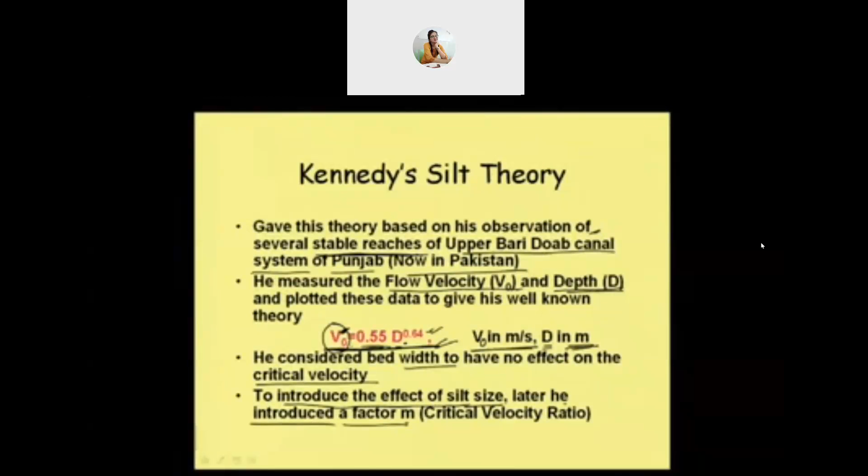So to introduce the effect of silt size, he later introduced a factor m, which he named the critical velocity ratio. So m is V by V0.

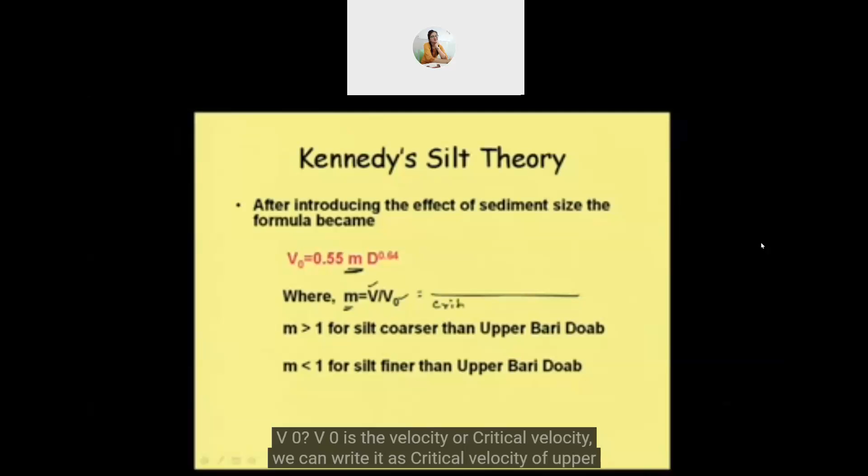Now what is V0? V0 is the critical velocity of the Upper Bari Doab canal system. And V is the critical velocity somewhere else, meaning the place under consideration.

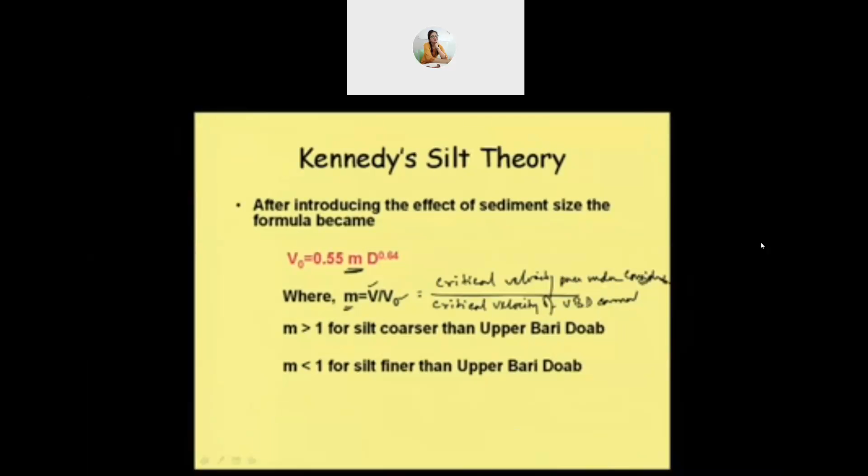By this we mean that if we know the critical velocity for the Upper Bari Doab canal region, we can find the critical velocity in other places. Or indirectly, if we know the m value for a particular region or a particular type of sediment, then we can find the critical velocity for that particular place.

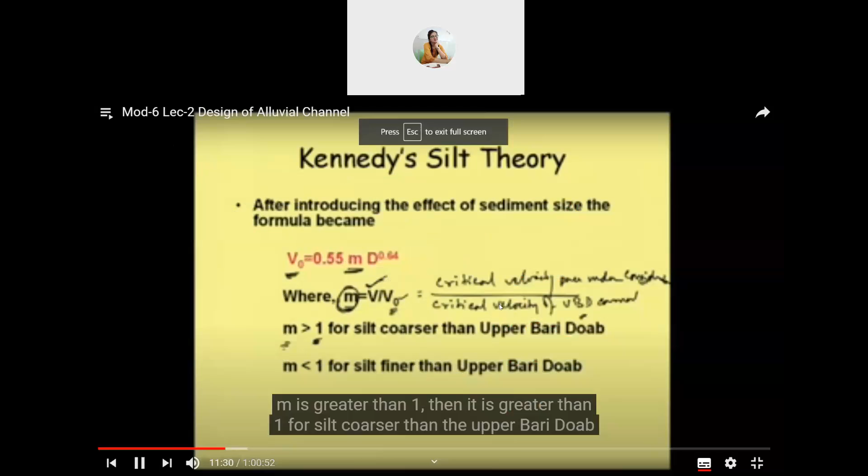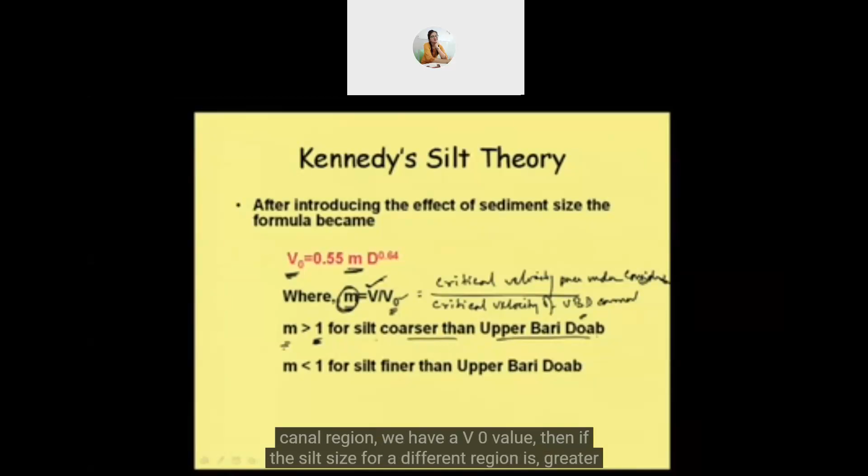So m is greater than 1 for silt coarser than that of the Upper Bari Doab canal region. Suppose for the Upper Bari Doab canal region we have a V0 value. If the silt size for a different region is larger than in the Upper Bari Doab region, then the critical velocity will definitely be larger.

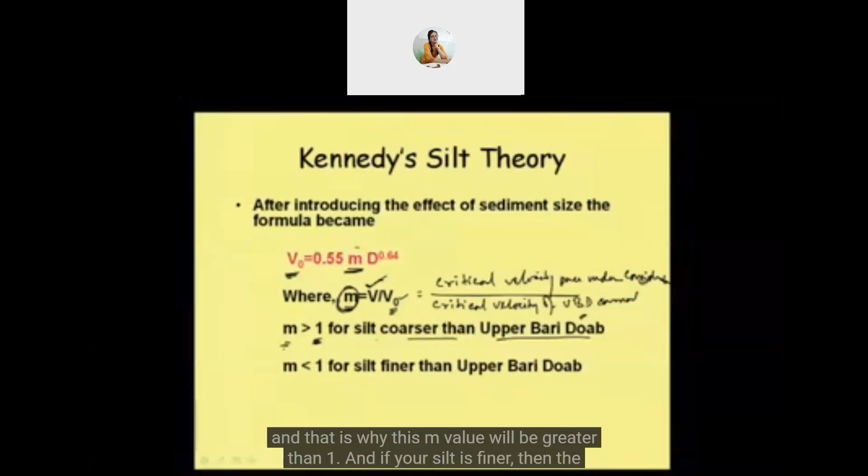That means a larger velocity will be required for eroding the channel, and that's why this m value will be greater than 1. And if your silt is finer than in the Upper Bari Doab canal region, then this m value will be smaller than 1.

And so then people are investigating, and other followers are working on that line, and they have given some value for m also for different parts of the country. And definitely, when using this equation, we should not use it directly in a particular region until we are sure about this m value.

Say this equation was developed in the region of Punjab, which is on the western part of our country. If we try to apply that equation in, suppose, the eastern part of the country, then we should conduct some experiment. Only then will we know the m value for this particular region, and only then should we apply this formula.

Of course, this Kennedy's formula has some limitations. And then what is the procedure? How do we use Kennedy's formula for designing our canal? Well, the basic equation used for design is the continuity equation. Along with Kennedy's equation, we'll require some fundamental equations for design of the canal. The continuity equation, as we know, is Q = A × V. And then we should use the uniform flow equation, because we design this canal for uniform flow conditions always.

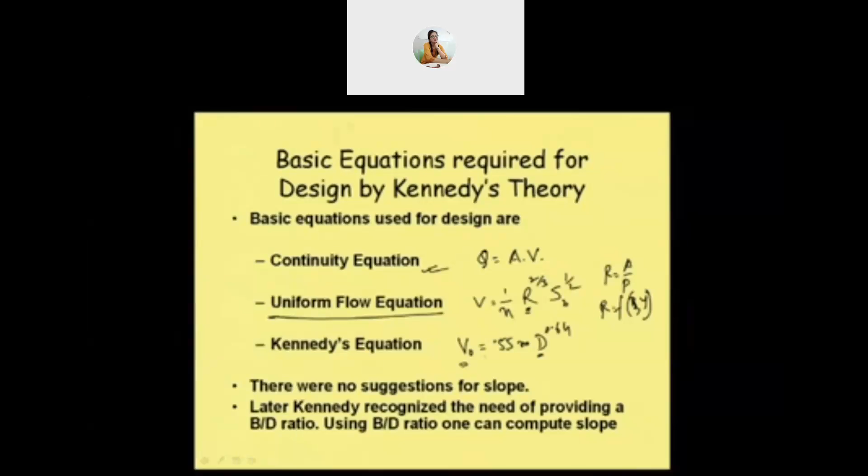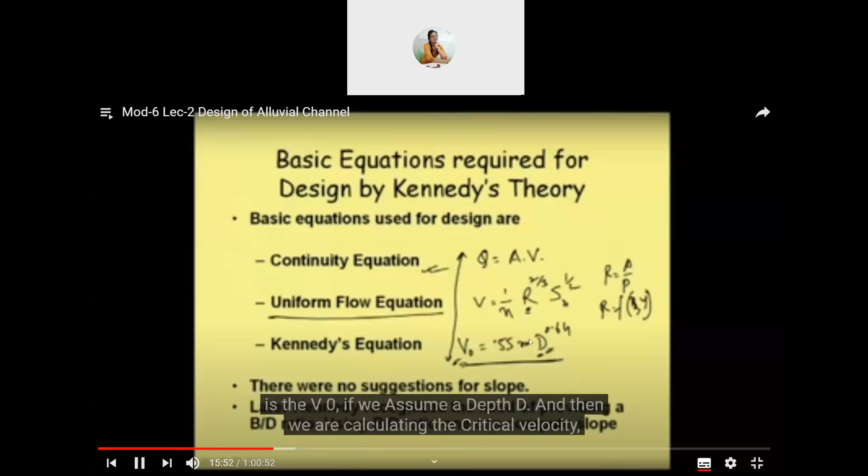But in this entire computational process for designing the channel, there is no mention of the slope. When we calculate the size of the canal, we are not considering the bed slope, particularly when using Kennedy's equation to find V0. We assume a depth d and calculate the critical velocity. Once we get the critical velocity, we can get the area of the canal.

Area is again a function of b and y. Y means the depth, and here we are using the symbol d, so I can write d in place of y. Depth is already known, so we can calculate b. Once we get d and b, we can calculate R. Then of course the bed slope will be known to us.

For that bed slope, we can now calculate our uniform flow velocity V. We can use Kutter's equation also, but as it is very lengthy, I am just writing Manning's equation here. For our requirement, we consider this to be the critical velocity. But when we calculate using the uniform flow formula, after getting b and d from the continuity equation and Kennedy's equation, we'll get another uniform flow velocity. If these two velocities are not matching, that means our design is not correct.

We are considering something to be critical velocity, but in reality we are getting something else, because the flow velocity what we are getting by using the uniform flow formula is actually the velocity what we will be getting in the field. So it is not matching. That means the d what we assume, initially we take a trial value of d, so the trial value of d that we did take is not correct.

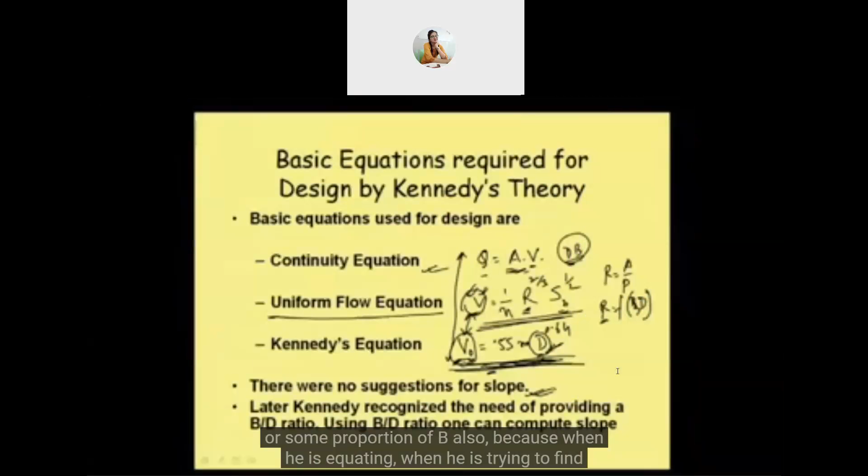Then later Kennedy realized that there is a need of putting some relationship or proportion of b also, because when he is trying to find this critical velocity with respect to d, at the same time he found that a b by d ratio can be given. That if this is the d, then this should be the b. Then only the channel will become stable. So based on that, some experimentations were carried out, and departments of the Punjab area at that time also conducted experiments, and they gave some b by d ratio.

Now, what is the advantage of having this b by d ratio? Earlier also we could calculate the ultimate size of the channel which matches this v, that is the Kennedy's velocity and the uniform flow velocity. But as I have mentioned, slope was not considered at that point. We are considering a slope which we get from the natural terrain, that is from the topography of the area. But there always remains a scope of adjusting the slope to some extent, as I was explaining earlier.

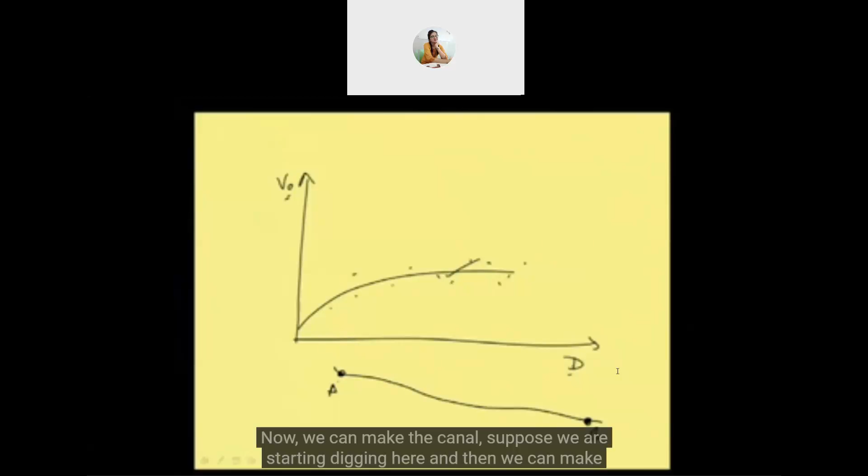Let me take some space. Say this is the area, and we are supposed to carry the water from point A to point B. We want to construct a canal. Suppose we start digging here, and we can make the canal like this. Or one can go like this. Another may cut this much and deposit this much. In this case he is cutting a lot but no deposition. So there is a scope of adjusting the slope to some extent, and that we cannot achieve when we do not use the B by D ratio.

Now when we use the B by D ratio, we are assuming a D, from that we are getting a V, and then from the B by D ratio we will be getting a B also. Using that B, we can try to see that if we adjust the slope with that B and D value, can we get this velocity?

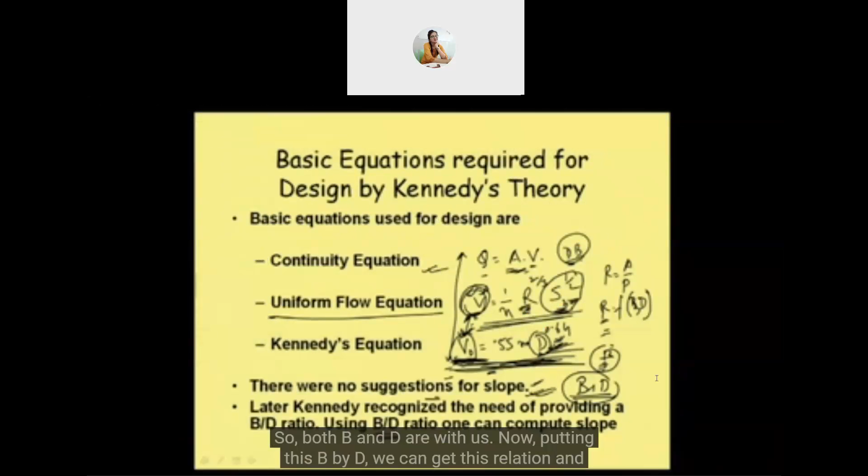So we'll try adjusting this as S, and with some adjustment of this as S, we'll try that. Because once we assume this D value, then as we have a B by D ratio, both B and D are with us. Now putting this B by D, we can get this relation, and then we can try to see whether we can adjust this value or not.

Of course, this Q is our prime requirement because we are trying to put that much of discharge. So this Q equal to A into V will have to be satisfied. So let us see step by step what we should follow. I have explained it briefly, and now step by step, first we need to assume the depth D. So depth D we are assuming.

Then using Kennedy's method, we are computing the velocity V, that is the critical velocity. Then we are computing the area from the continuity equation. Then from known area and the depth D, we need to compute the bed width B. Of course, when we are using this Q, our shape can be trapezoidal, rectangular, anything. That we'll have to decide. We did discuss how we decide the shape.

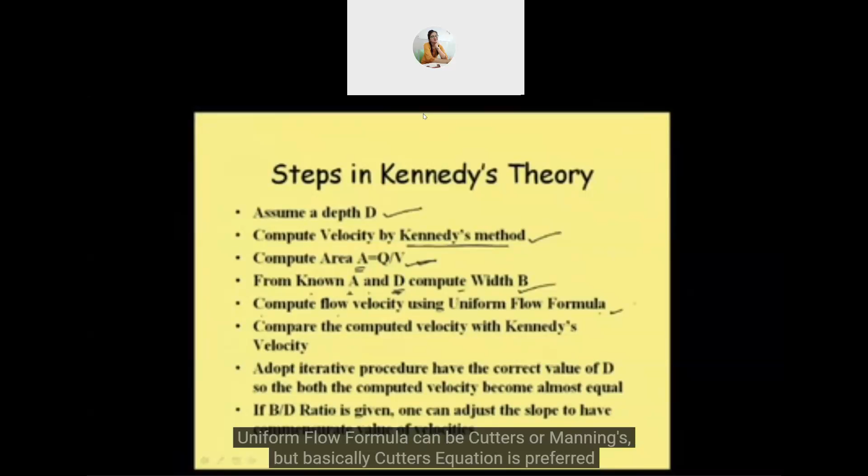Then next step is to compute flow velocity using uniform flow formula. This uniform flow formula can be Kutter's or Manning's, but basically Kutter's equation is preferred here. Then we should compare the computed velocity, meaning what velocity we get from the uniform flow formula, with Kennedy's velocity. Then from this step we should go for an iterative procedure.

So adopt an iterative procedure and have the correct value of D, so that the velocities computed by the Kennedy method and by the uniform flow method become almost equal. Exact value may not be matching. So this is the procedure. And if B by D ratio is given, one can adjust the slope to have a commensurate value of velocity, meaning these two velocities should be almost equal. So those are the steps that we follow in Kennedy's theory.

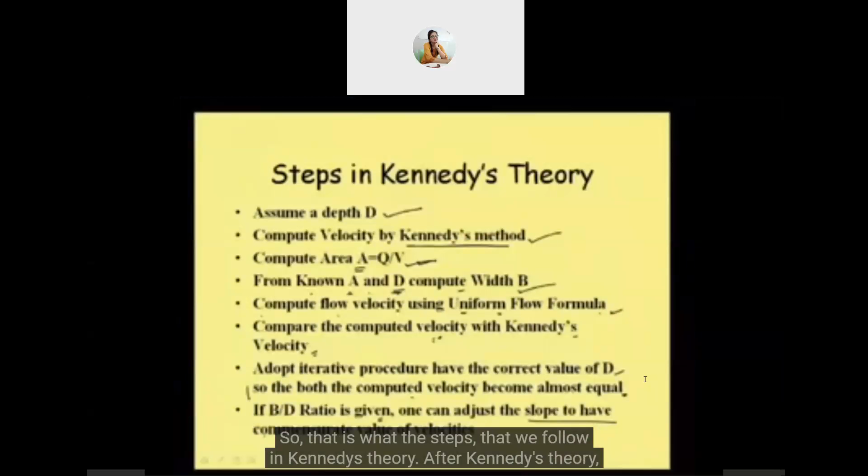After Kennedy's theory, the next theory that came is Lacey's regime theory. We gave the name in the last class and discussed how it was originally developed, so we are not going to that part. But his principle is the regime channel. Of course, it is similar to having a critical velocity, but he is suggesting that a particular size of the channel can be regarded to be in regime condition.

And what is regime condition? If we allow the water to flow in a channel, then depending on the flow velocity and the size of the channel, the water will have erosive power if the flow velocity is high. Then it will start eroding the channel, in an alluvial channel I am talking about. And the reverse, if the size of the channel is very large and the flow velocity is very low, always talking about a particular discharge.

For that discharge, if our flow velocity is very low, as it will be carrying some sediment, because in an alluvial channel sediment is a must, those sediments will start depositing in the bed. So ultimately, if we allow a channel to run for a long time, it will adjust its own size. The width may increase, the depth may increase, or due to sedimentation, width and depth may decrease. That process will continue.